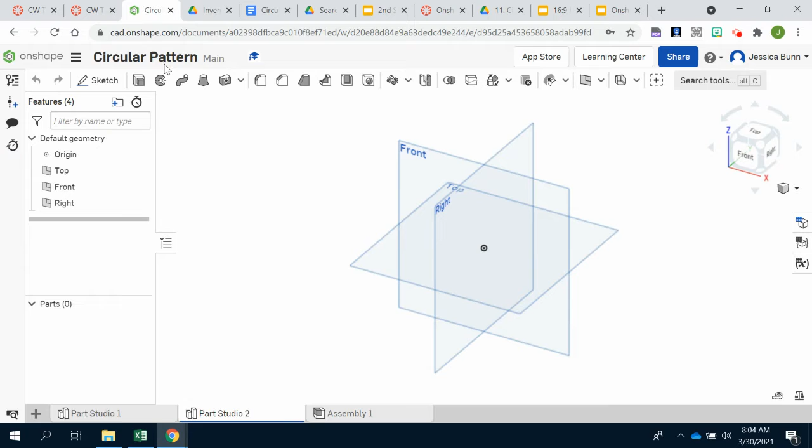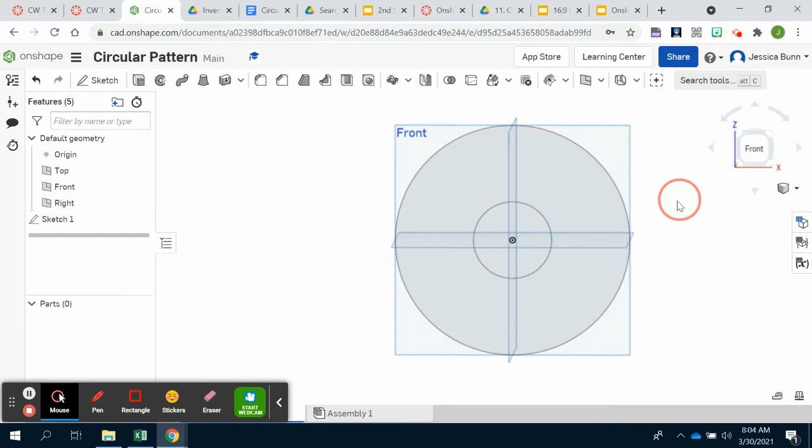We'll come over to Onshape and start a sketch on the front surface, changing the orientation to the front view and creating a circle with a diameter of 6. I'll add another circle with a diameter of 2, then finish that sketch. I'll zoom out and rotate to see everything, and extrude this shape for a distance of 0.5, making sure it removes the center, like this.

We're then going to place a point on this front surface to drill a hole, and then we'll use that hole to create the pattern around.

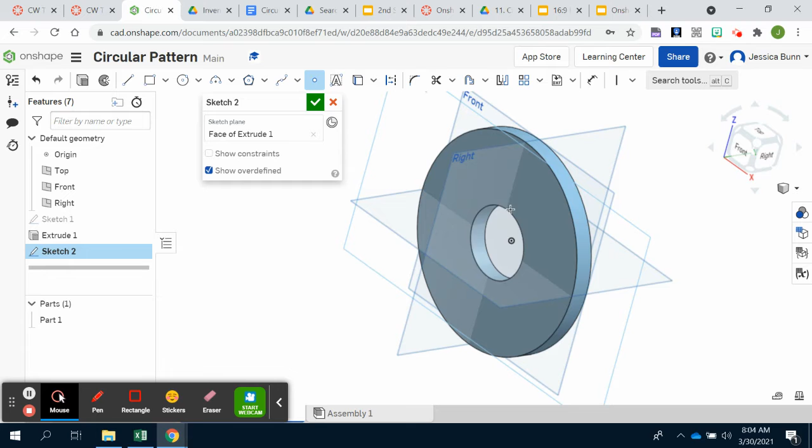I'm going to start a sketch here on the front, then add in a point, making it vertically aligned with this. I'll dimension this to be 2. Make sure this point and the center point are vertically aligned. If you need to add a vertical constraint, you can do that, then click your green check to finish the sketch.

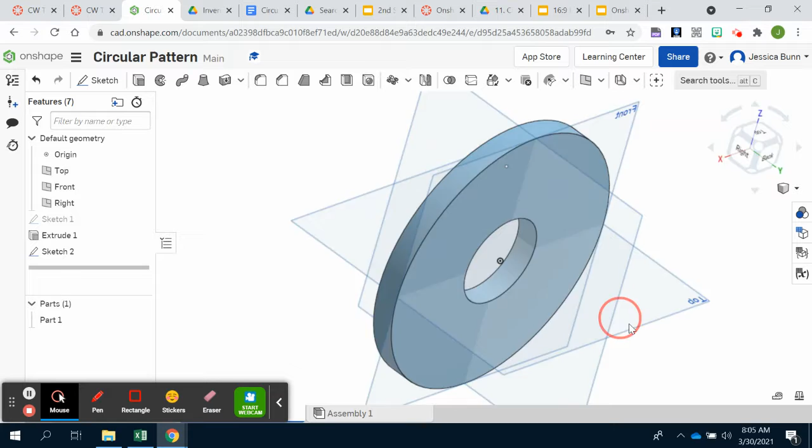I'm then going to drill a hole using this point. We want it to be a simple hole that goes all the way through with a diameter of 0.75. Click your green check and it should look something like this.

We're then going to use this hole to create a circular pattern. We want there to be 6 holes in total whenever we're finished.

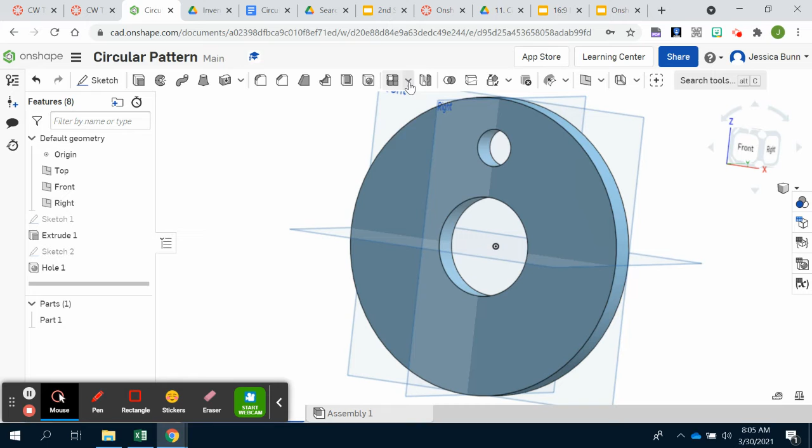So we will click circular pattern. If you don't have this here, you can find it underneath the linear pattern option. If yours looks like this, just click the dropdown box and choose circular pattern.

We want to choose the hole. It may be a little difficult to click on it, or at least mine was. You want your axis to be any of these circular edges. You can really use any edge, but since we don't have a work axis, you'll have to find an alternative. So something like this, and then I'll go back and it should populate. There we go. If you just click around, it will eventually work.

You want your angle to be 360, meaning we want it to go all the way around. If you only wanted it to go halfway, you could change it to 180. But we do want to see the difference, so we do want it to be 360. And we want 6 holes in total, including the original one, so change that number to 6. You'll see it looks like this, then click your green check.

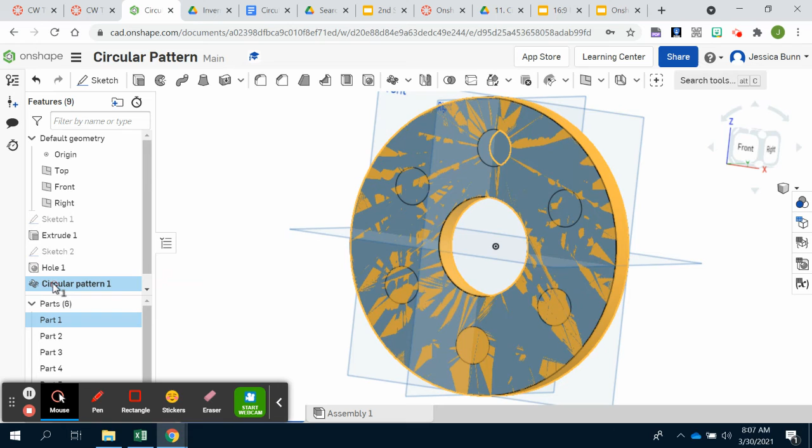If you ever need to go back and edit anything, you can always double click here. And as you can see, mine didn't remove the holes, it just kind of filled them in.

So I'm going to choose remove instead. That didn't work.

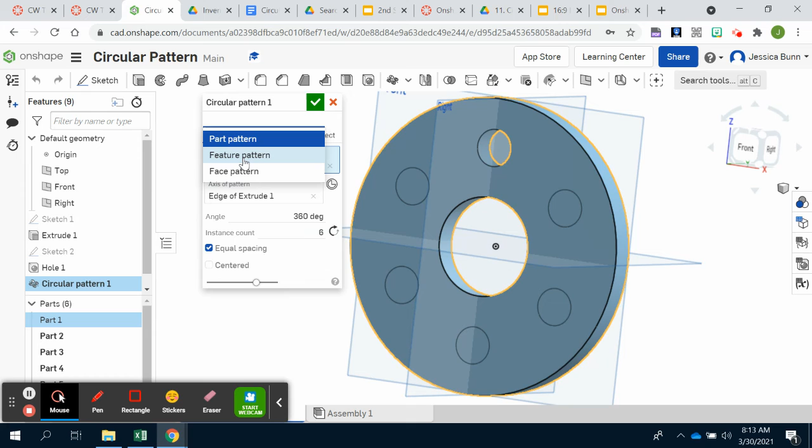If yours does the same thing, it's because we didn't choose the correct circular pattern. Again, if you need to go back and edit something, you can double click here. Notice we are under part pattern, not a feature. So if you change that to a feature, you should then be able to select just the hole, and the axis selects itself. Then click your green check, and now you have a successful pattern there.

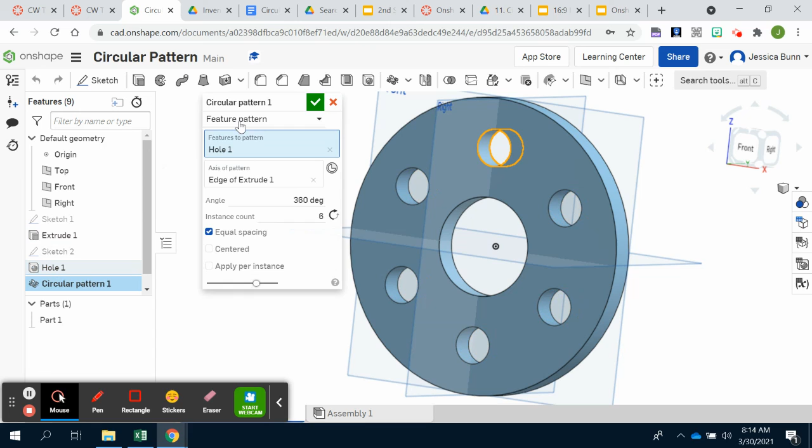So if yours didn't work the first time either, it is simply because we didn't change this option here to feature pattern instead of part.